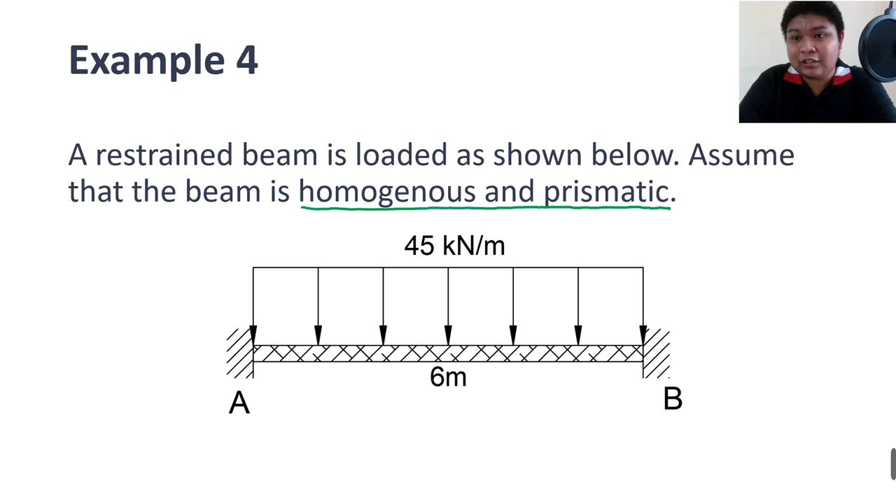Especially since our beam has a uniformly distributed load. So what are the questions here? Letter A, what is the vertical reaction at B? Letter B, what is the moment reaction at B? Letter C, what is the vertical reaction at A? Letter D, what is the moment reaction at A?

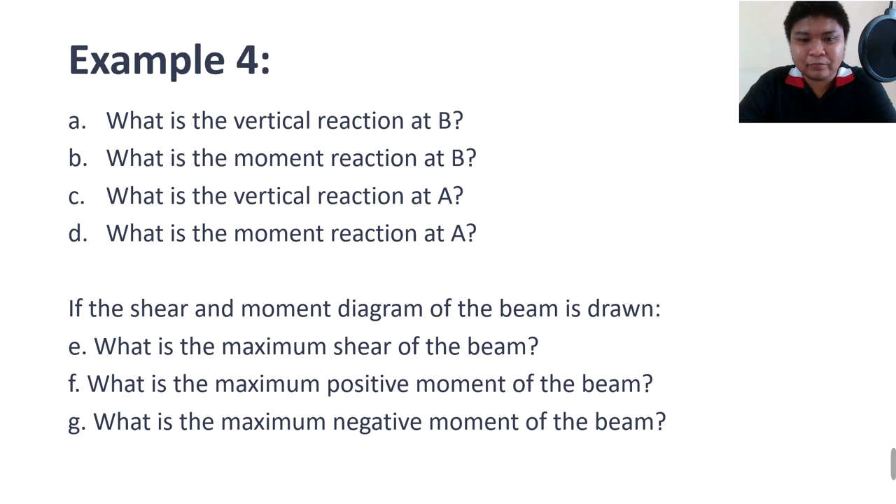Then, if the shear and moment diagram of the beam is drawn, letter E, what is the maximum shear of the beam? Letter F, what is the maximum positive moment of the beam? And letter G, what is the maximum negative moment of the beam? Let's go to OneNote and try to solve it.

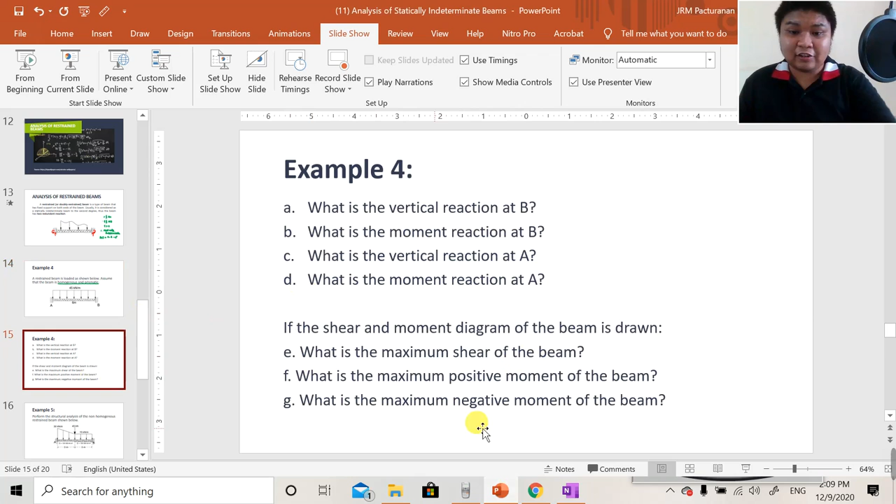I'll paste the question itself. So this is our example number 4. At the same time, let's include the questions. Now let's write the solution.

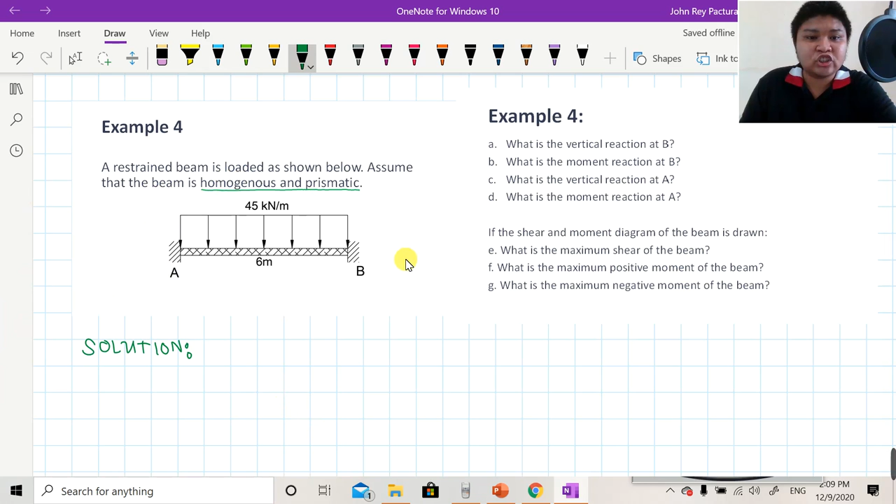Like the first example I presented for the propped beam, I will try to solve this beam using three methods: double integration, moment area, and conjugate beam method. But since there are two redundants here, we will have two equations, two unknowns.

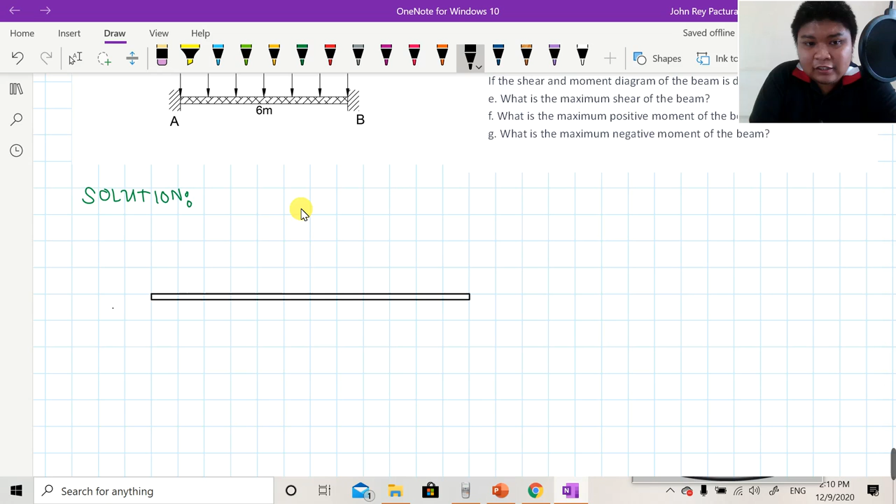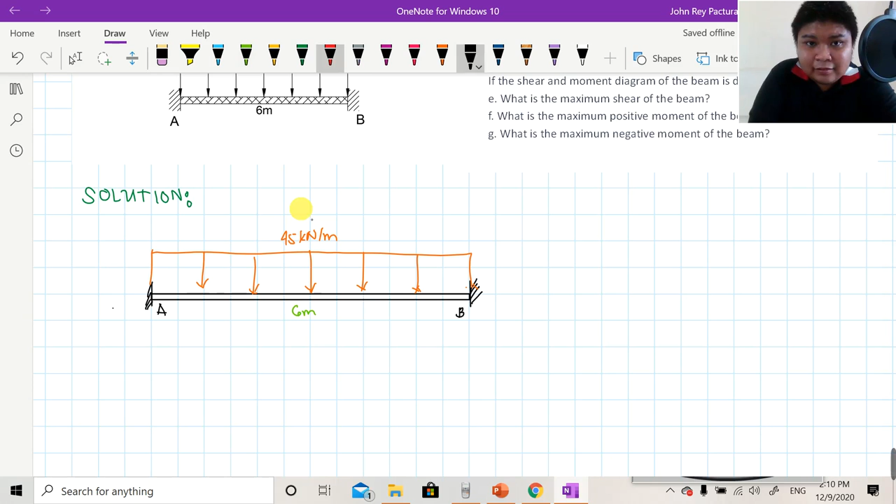Loading is 45 kN per meter. Let's put the dimension of 6 meters. At the same time, the points are A and B. So of course, the reaction RA and the moment reaction MA, and the reaction RB and moment reaction MB.

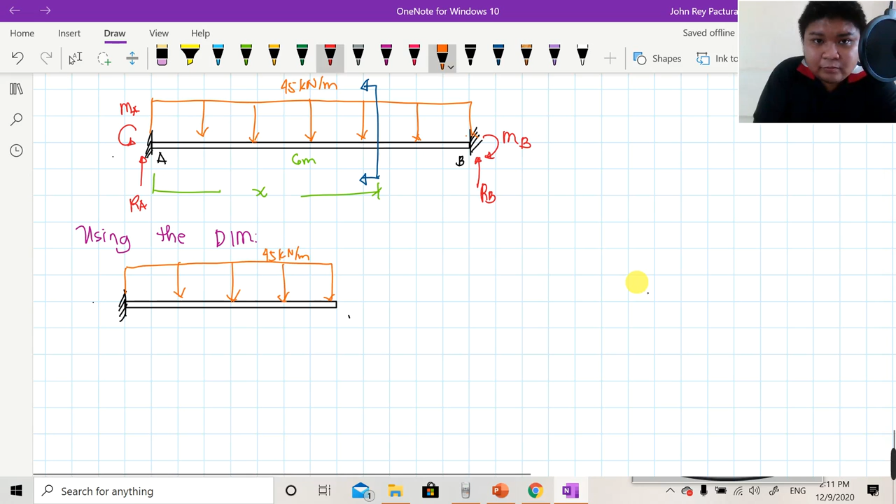Sabihin na natin na ito yung naka-cut na bahagi, tapos yung ating distributed load na 45 kN per meter. Ilagay ko yung mga reactions natin na RA at the same time yung moment at A. Ito yung iseset natin as point A, at ito yung iseset na point X. Yung distance dito ay X.

Ang unang step natin kapag double integration method, kailangan natin i-establish yung moment function. Taking summation moment at X equals 0, ibig sabihin clockwise moment equals counterclockwise moment. Erase ko na muna to para hindi na nakakalito.

Considering point X dito sa cut natin, guys, ang clockwise moment lang natin ay isa lang, yung RA, equal sa RA times distance niya na X. Ang counterclockwise naman, equal to MA, tapos yung 45 kN, yung length niya ay X, at yung centroid ay X over 2 kasi nandito siya, yan yung center of gravity, plus yung moment function natin. Pag sinimplify natin to, ang moment natin ay equal to RAX minus MA minus 45 over 2 x squared. Ayan na, meron na tayong moment function.

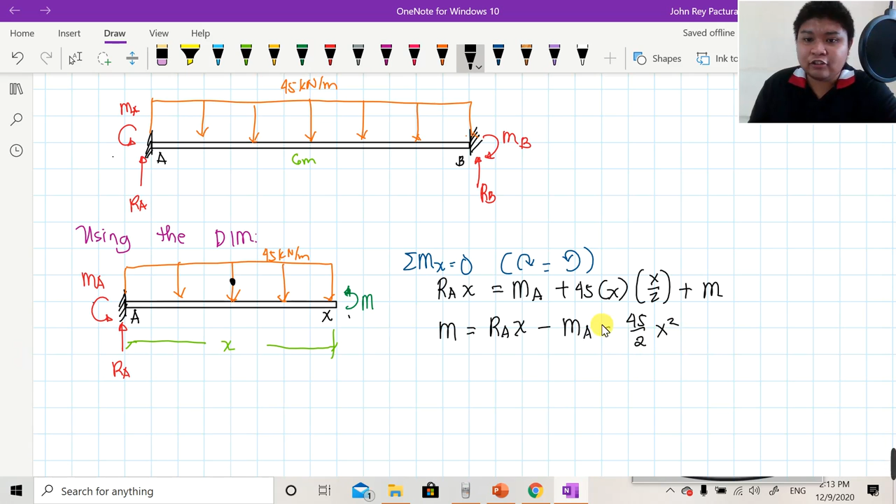Pagkatapos nito, ready na tayong mag-double integration. Una, EI y double prime, isulat mo yung mismong moment function: RAX minus MA, since this is a moment ilalagay ko muna x raised to 0, kasi usually kapag DIM nag-x raised to 0 tayo, pero makakancel out din naman yan kasi dalawang beses yung process of integration natin. Minus 45 over 2 x squared.

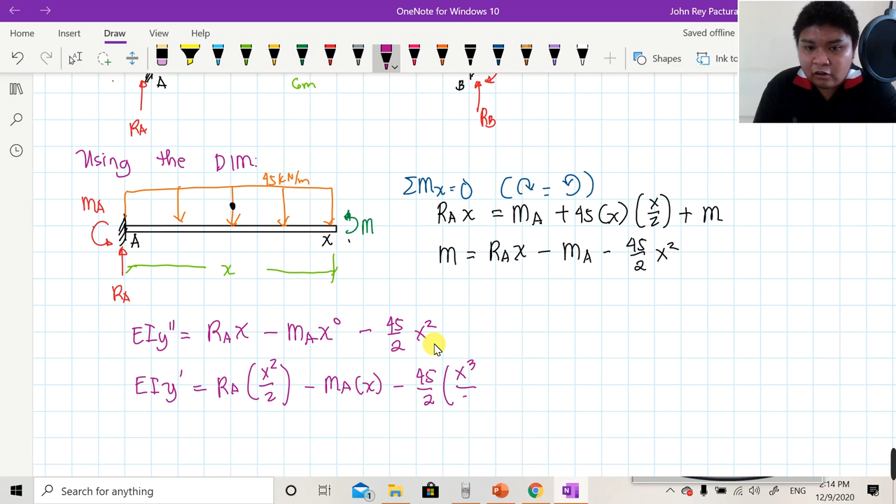Para sa first integration, ang mahahanap natin ay EIY prime, equal sa RA times x squared over 2, minus MA times x, minus 45 over 2 times x cubed over 3. Remind ko lang kayo, kapag nag-i-integrate kayo, do not forget the arbitrary constant c sub 1. Pag sinimplify natin to, magiging 1/2 RA x squared minus MAX, minus 15 over 2 x cubed plus c sub 1. Ayan, na-simplify na natin yung unang integration.

Therefore, i-follow up na natin yung second integration, magiging EIY. Yung 1/2 RA magiging x cubed over 3, minus MA x squared over 2, minus 15 over 2 x to the 4th over 4, plus c sub 1x plus c sub 2. Kapag in-arrange natin to, magiging 1 over 6 RA x cubed minus 1/2 MA x squared minus 15 over 8 x to the 4th power plus c sub 1x plus c sub 2.

Ayan, natapos na natin yung ating dalawang integration. Meron tayong dalawang arbitrary constants, c sub 1 and c sub 2, at para ma-solve natin yon kailangan natin ng boundary conditions. Usually, sa mga statically determinate structures, meron lang tayong dalawang boundary conditions, pero kapag indeterminate, more than 2.

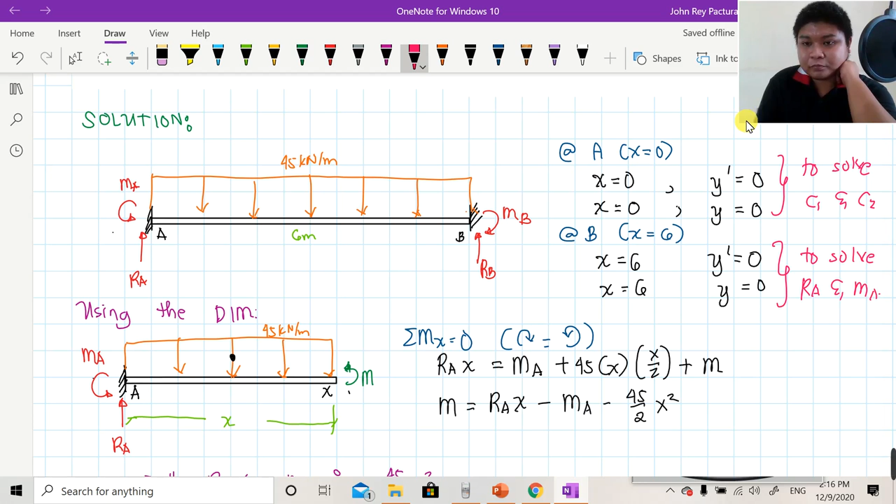Sige, simulan natin isolve yung C sub 1 and C sub 2. Ilagay natin na at x is equal to 0, y prime equals 0, yun yung nasa point A. Ito ang gagamitin nating equation.

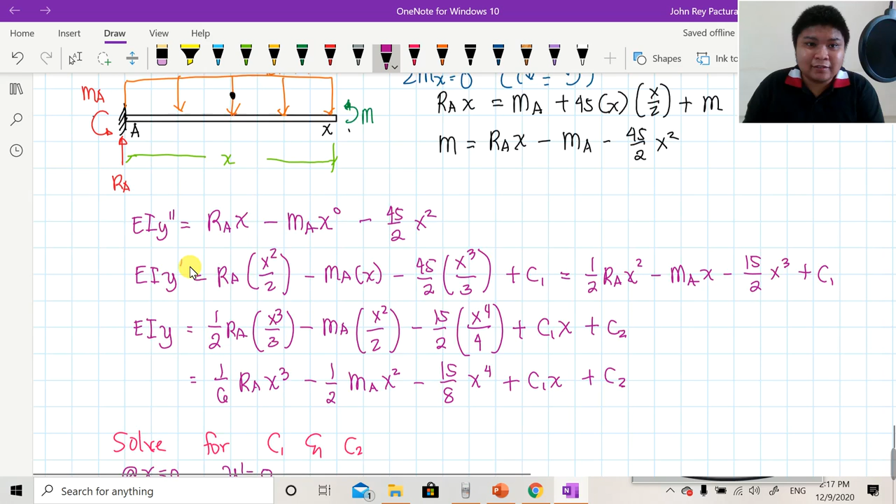EI, syempre ang y prime is 0: EI is 0 equals 1/2 ng RA tapos 0 squared minus MA times 0, minus 15 over 2 times 0 cube plus C sub 1. Kung i-observe mo, lahat din lang naman yan maka-cancel out, so pwede na natin i-conclude na yung value ng C sub 1 natin ay equal sa 0. Same thing ang mangyayari kapag sinet na natin yung another boundary condition na at x is equal to 0, y is equal to 0. Since this is the deflection, ito na yung gagamitin natin.

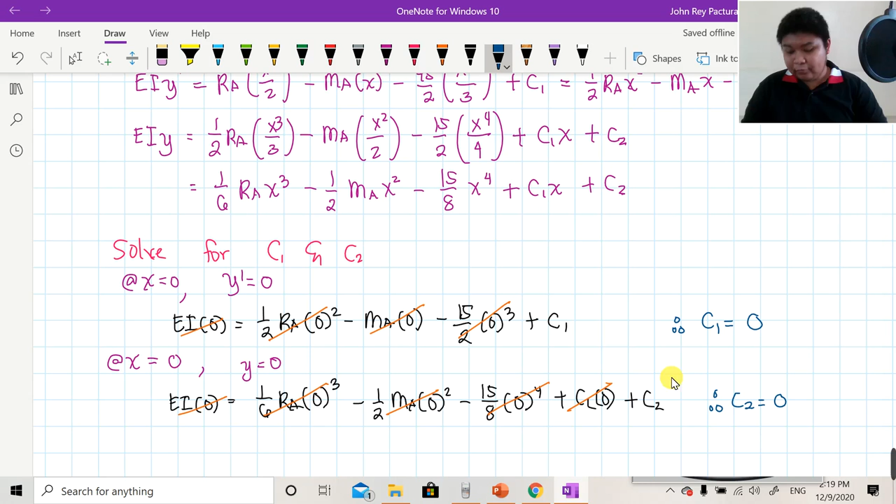So therefore, ang magiging solution natin ay EI0, that is 1 over 6 RA ng 0 cube minus 1/2 MA ng 0 squared minus 15 over 8 ng 0 fourth, plus C sub 1, 0, plus C sub 2. At mag-cancel out din naman sila, kaya ang magiging value ng C sub 2 natin ay equal din sa 0. So na-solve na natin na C sub 1 and C sub 2 are both equal to 0. After natin nitong ma-solve, gagamitin natin yung another set of boundary conditions para ma-solve natin yung MA saka yung RA.

Okay, so solve for the reaction at A and yung moment at A. So yung una kong gagamitin na condition is at x is equal to 6, y prime is equal to 0. So ito na siya, gamitin mo ulit ito.

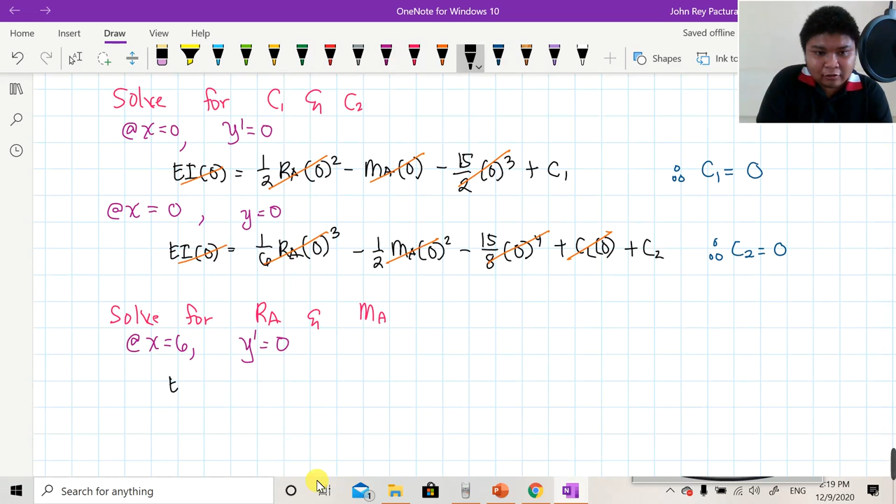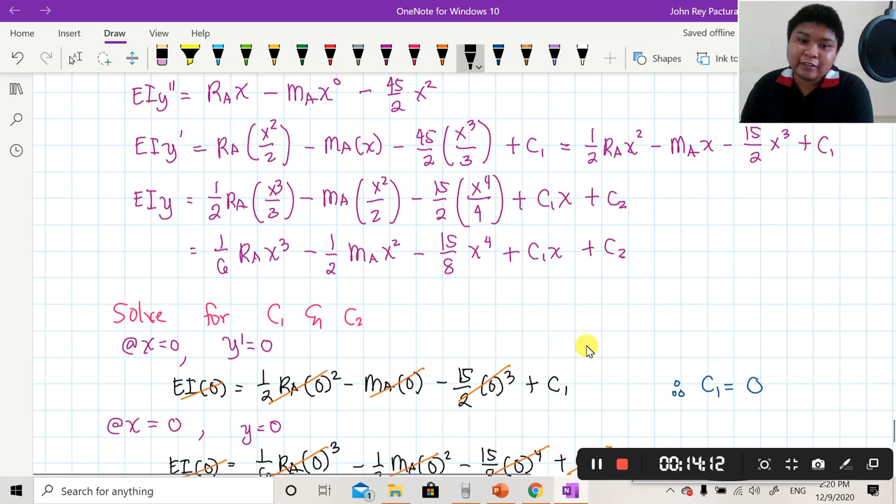Since y prime equals 0, EI 0 is equal to, dito na tayo tututok, ito, kasi ito yung na-derive natin na EI y prime. Pero do not forget na yung x natin sa pagkakataong ito ay equal na sa 6. So therefore, that will be 1/2 ng RA, tapos 6 squared, minus MA, times 6, minus 15 over 2 ng x cube. Lagay natin siya as 15 over 2 ng x cube, which is 6 cube. Supposed to be, may C sub 1 pa dito na i-consider, but of course, alam nyo naman na C sub 1 is equal to 0, so okay na yan.

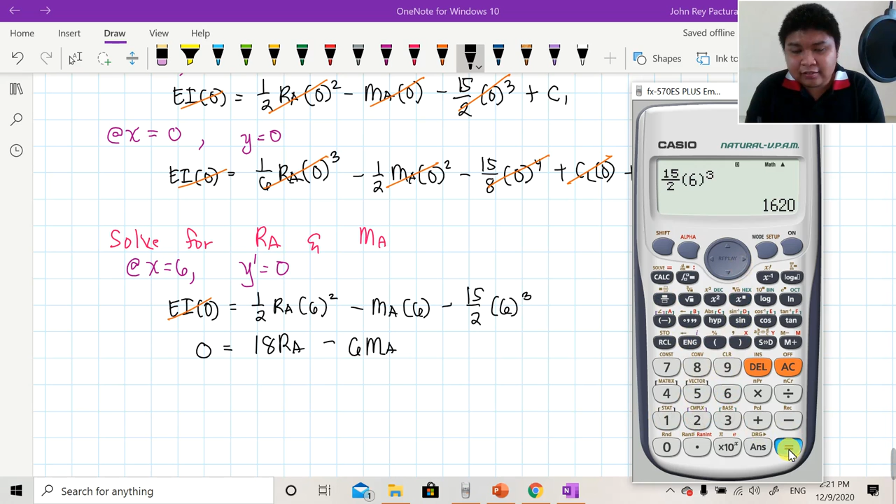Kapag sinimplify natin to, ang kalalabasan, 0 is equal to 1/2 ng 6 squared is 18 RA minus 6 MA. Check ko lang, 1/2 ng 6 squared, ang sagot is 18, tapos 6 MA, then 15 over 2 ng 6 cube. Ang sagot natin ay 1620 minus 1620. Para maging equation siya, ang kalalabasan ay 18RA minus 6MA is equal to 1620. So ito na ang ating equation number 1.

As I said, usually 2 equation, 2 unknown ang masosolve mo dito. So next tayo, at x is equal to 6, y is equal to 0. So this time, ito na yung gagamitin natin. But do not forget that c sub 1 and c sub 2 are both equal to 0, so therefore wala na tayong problema doon.

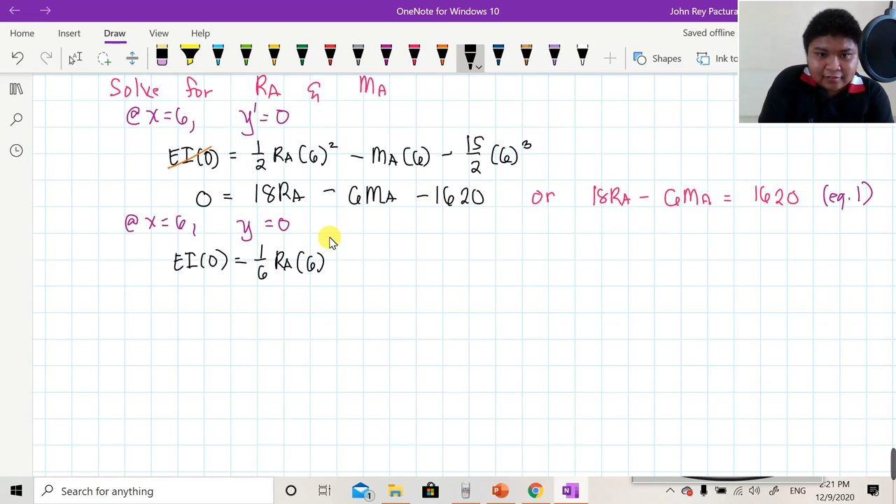I-substitute mo lang as EI0 is equal to, ito siya, 1 over 6 RA x cube. So 1 over 6 RA, tapos 6 cube minus 1 half MA 6 squared, minus 15 over 8 x to the fourth, minus 15 over 8, 6 to the fourth. Ulitin ko lang yung sinabi ko, c sub 1 and c sub 2 are equal to 0, so therefore makakancel out din lang naman itong EI0. So 0 is equal to, pag kinompute natin ito, that will be 1 over 6 ng 6 cube.

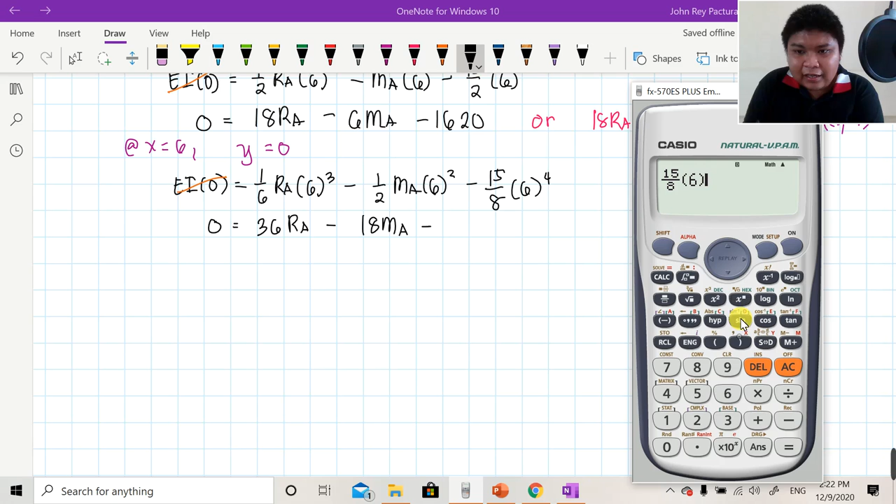36 RA minus 1 half ng 6 squared. Ilan siya? 18, 18 MA, then minus 15 over 8 ng 6 to the fourth. Ang magiging sagot natin ay 2430. Pag in-arrange natin ito para maging second equation, arrange natin siya as equation 2: 36 RA minus 18 MA equals 2,430. Set mo lang to as equation number 2.

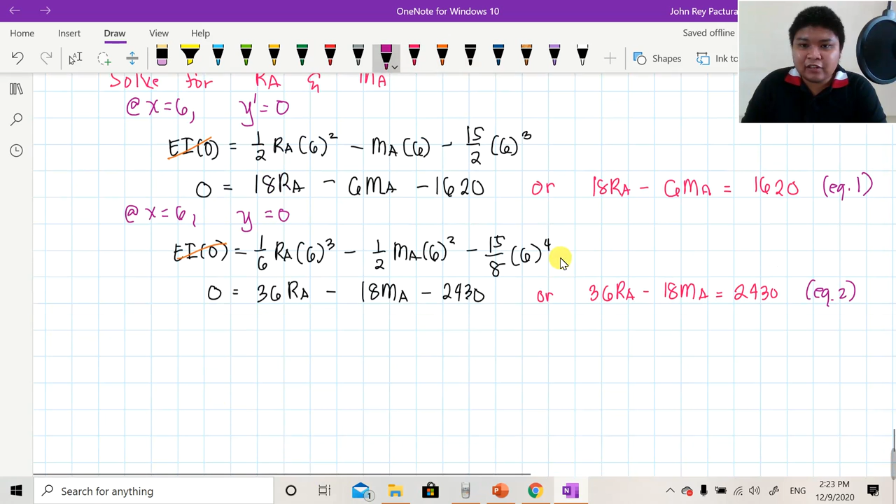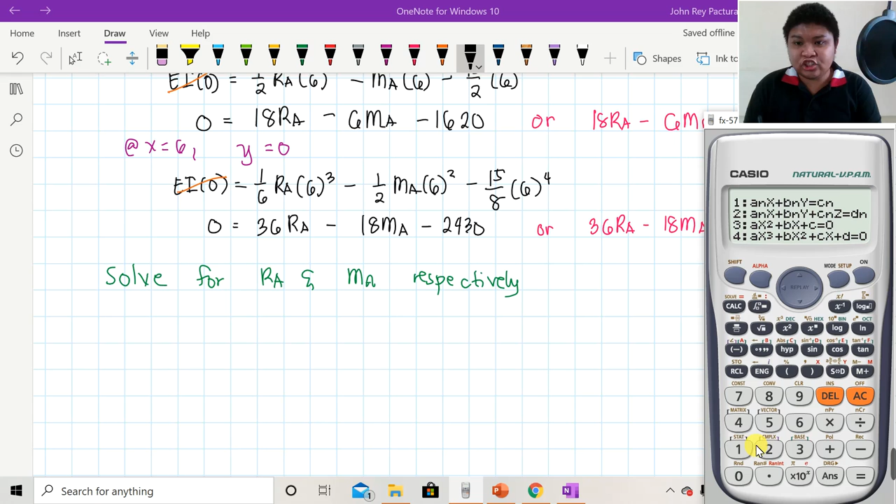We have 2 equations, 2 unknowns ang hinahanap natin. Pag sinolve natin yung dalawang equation na yan, mahahanap mo na yung RA and MA respectively. Solve for RA and MA respectively. Ang mangyayari dito, bahala ka nang mag-explore sa calculator mo, pero yung nakikita nyo sa screen nyo na calculator ko na emulator, syempre may equation solver siya. So I assume na yung ginagamit nyo rin na calculator ay capable na mag-solve ng 2 equations, 2 unknowns.

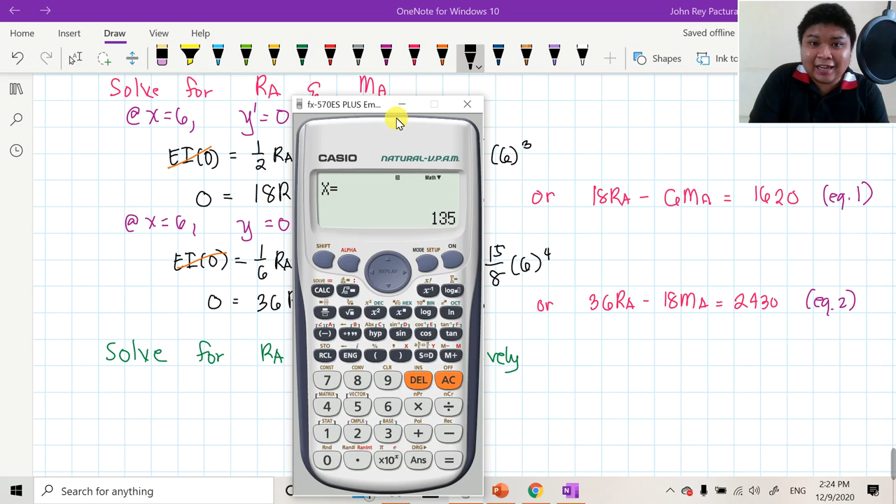So for equation 1, that will be 18, negative 6, then 1, 6, 20. Tapos for equation number 2 naman, that will be 36, negative 18, tapos 2430. So yung ating RA will be 135 kilonewton. RA is 135 kilonewton. On the other hand, yung MA natin is equal to 135 kilonewton meter din as well, 135 kilonewton meter.

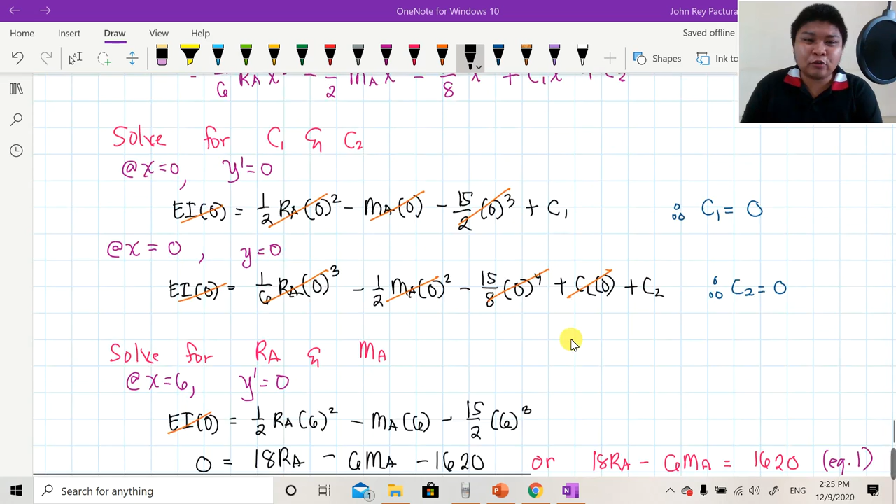So ayan, naipakita ko na sa inyo kung paano natin siya isosolve using the double integration method. Kaya lang, ulitin ko, may bias ako dito sa pag-solve. Usually, ang favorite ko ditong method is either the moment area method or the conjugate beam method, kasi naman napakaraming equations na ipoproduce mo using DIM, right? So isolve natin ito using the moment area method. By moment area method, i-drawing natin yung magiging moment diagram by parts niya.

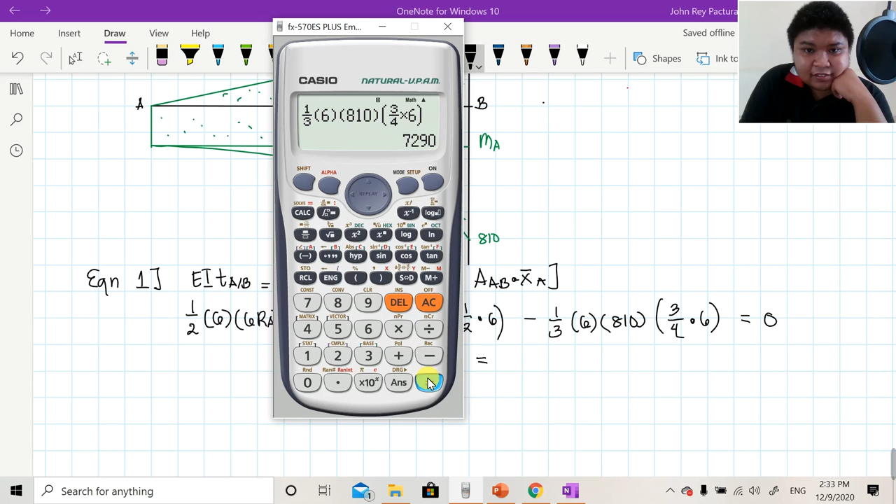of 6,810 tapos 3/4 ng 6. So, ang sagot natin ay 7,290.

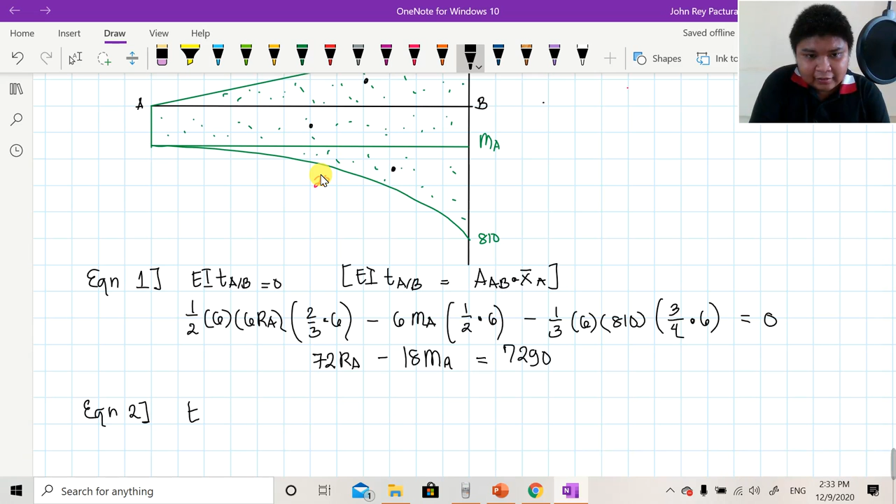Next, using equation 2 naman, this time kapag equation 2 ang gagamitin natin, yung EI, area, sa gitna ni A and B is 0. So literal lang, nakokomputin lang natin yung area, wala nang centroid na pag-uusapan.

So that will be 1/2 ng 6, tapos 6 RA, and of course, yun lang naman ang ating positive, the rest na area ay negative. Halimbawa, ang MA, multiply din natin ng 6 kasi di ba tingnan nyo, MA times 6 lang naman siya. And lastly, for the spandrel of the parabola, 1/3 lang ng 6 tapos 810.

So that will be equal to 0. Again, pag isimplify natin to, ang magiging result ay 18 RA, tama ba no? 18 RA siya, minus 6 MA. So pag nilipat natin yon, 1/3 ng 6 tapos 810. Ang lalabas ay 1620. So 1620.

Ito na, meron na tayong 2 equations, 2 unknown. So this is equation number 1. This is equation number 2. Again, gamitin mo na lang yung ating calculator to solve those 2 equations. Solve for RA and MA using equation 1 and 2. So, mahahanap natin na yung value ng RA natin and yung value ng MA.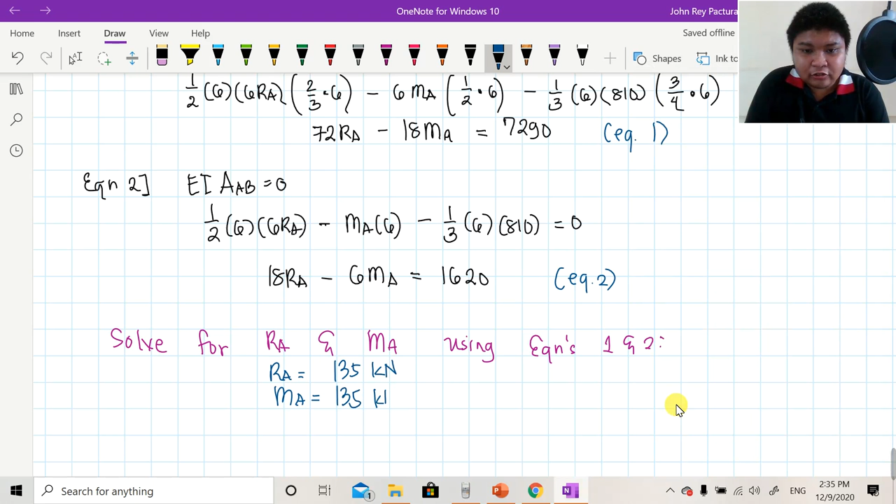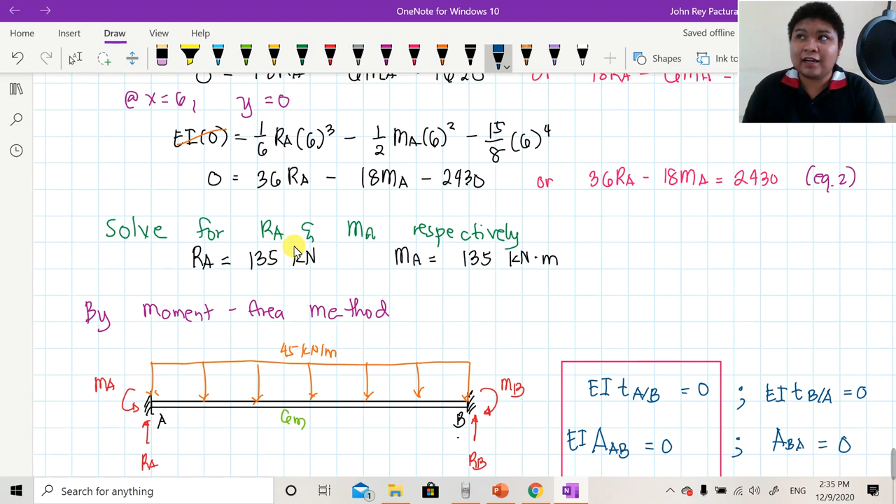So dalawang methods na ang prinesent ko sa inyo and parehas tig 135 ang nakukuha. So I hope wala nang doubt sa paggamit ng method na gagamitin nyo for your future analysis. Pero still, meron pa tayong pangatlong method na kailangan i-present using the conjugate beam method. Sige, mag-conjugate beam naman tayo.

Well, wala namang pinagkaiba yung moment area method saka yung conjugate beam kasi kung ano yung na-drawing natin na moment diagram by parts, yun din naman yung gagamitin natin sa conjugate beam. Kaya lang, syempre, yung area sa taas magiging upward distributed load tapos yung area sa baba, that will be the downward distributed load. Okay? So, sige, pakita ko na lang sa inyo kung ano yung magiging solution natin for conjugate beam method.

So halimbawa, meron tayong real beam na restrained beam. Sulat na lang natin siya as real beam. And ilagay natin yung mismong load na 45 kilonewton. Diba? So ito siya.

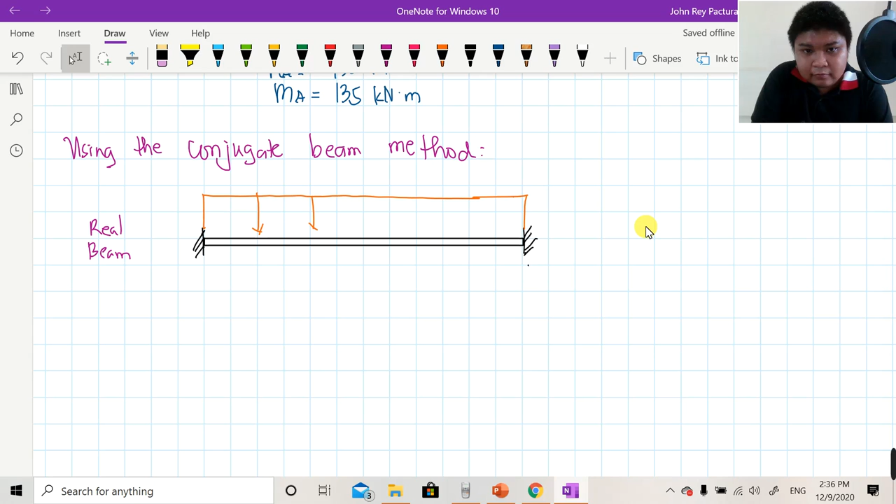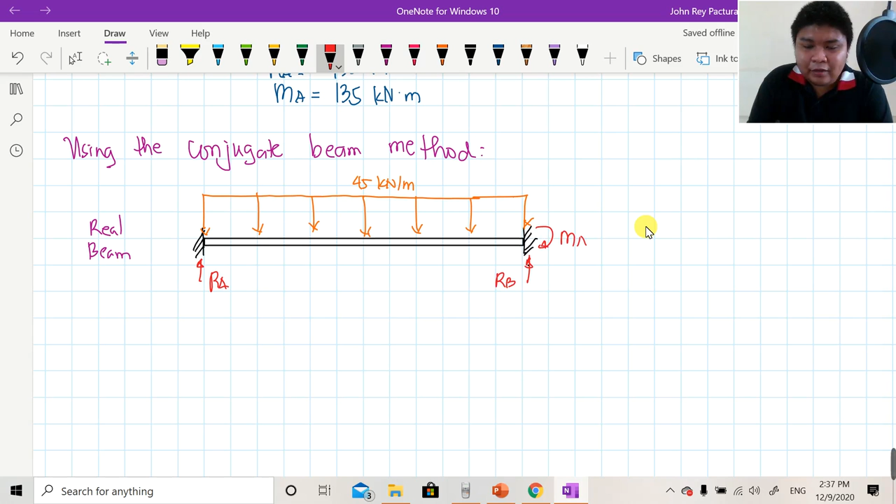Take 45 kilonewton per meter, sorry. So 45 kilonewton per meter. And do not forget to place the reactions RA, tapos RB, and the end moments MA, then MB. Yung ating length ay 6 meters.

Kapag drawing natin yung conjugate beam, ang mangyayari dito is magiging unstable siya. Ulitin ko, sa conjugate beam method, kung ang original na beam ay statically determinate, syempre pagdating sa conjugate beam, statically determinate din siya. Pero kapag yung original beam natin ay statically indeterminate, pagdating naman sa conjugate beam, magiging unstable siya.

So, for conjugate beam, ang mangyayari, wala na siyang support. Bakit? Kasi 'di ba, kung fixed dito sa both ends, pagdating sa conjugate beam, dapat maging free siya. And since walang support, malamang unstable na rin talaga siya.

I-copy ko lang yung ating moment diagram by parts from the moment area method. So yung una, this is 6RA. So sige, drawing natin siya as 6RA. And this will be an upward force kasi nasa taas siya. So, lagay ko lang pala na point A dito, tapos point B. So, 6RA. Tapos, meron tayong moment na MA.

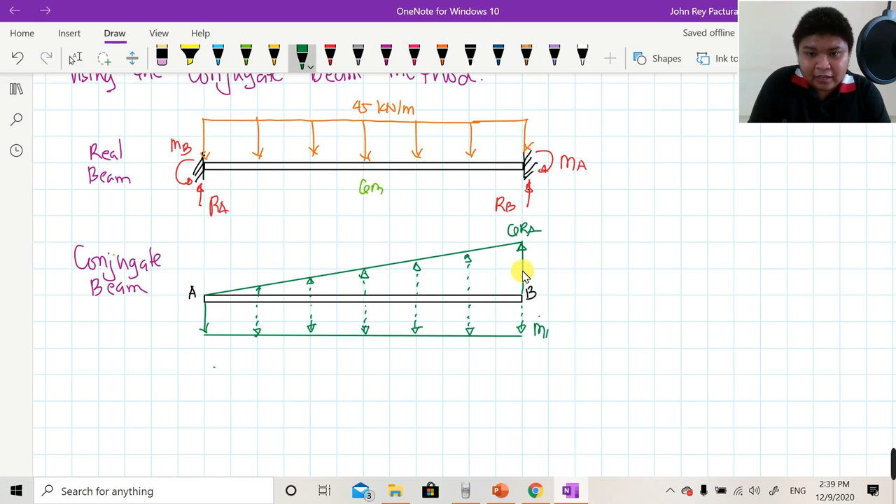Drawing din natin yung MA na yon. Pero pababa na siya. Ayan. So, yung kanyang magnitude ay MA. And lastly, do not forget the spandrel of the parabola. 810 yung kanyang magiging height. Drawing lang natin. Lagay ko pala yung degree as first degree, second degree. And ito, 810. So, ito na yung ating conjugate beam.

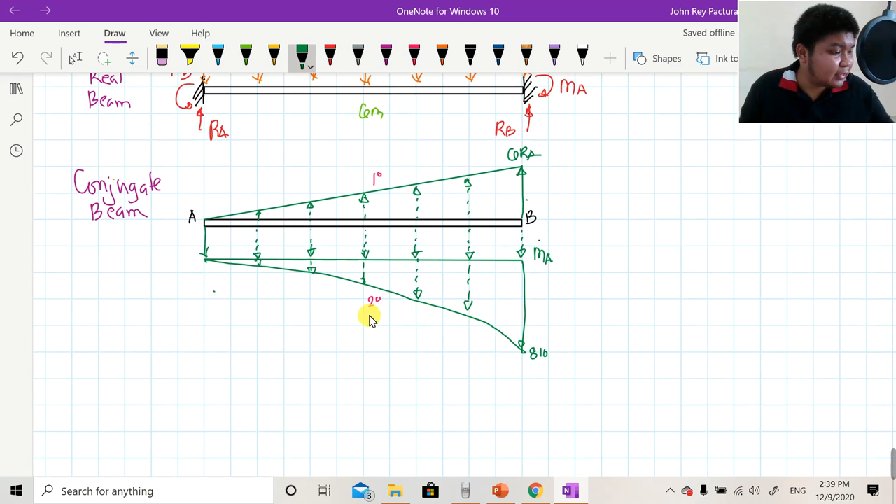So, this time, gagamitin natin yung dalawang equations of equilibrium para sa conjugate beam. So, usually, ang magiging kalalabasan ulit nito, two equations, two unknown. So, yung una, lagay ko dito na consider conjugate beam. Yung unang magiging process natin, summation forces vertical equals 0. So, up equals down. So, yung upward force natin is itong triangle and itong natitirang dalawa ay mga downward force.

Kaya 1/2 ng yung base ay 6 tapos 6RA. Yung downward forces natin ay 6MA. Then, syempre, for the spandrel of parabola, 1/3 ng 6 tapos 810. So, pag inayos natin to, for instance, itong 1/2 times 6 times 6, pwede natin to class magawa as 18RA, di ba? Tapos, transpose mo lang itong 6MA, so minus 6MA.

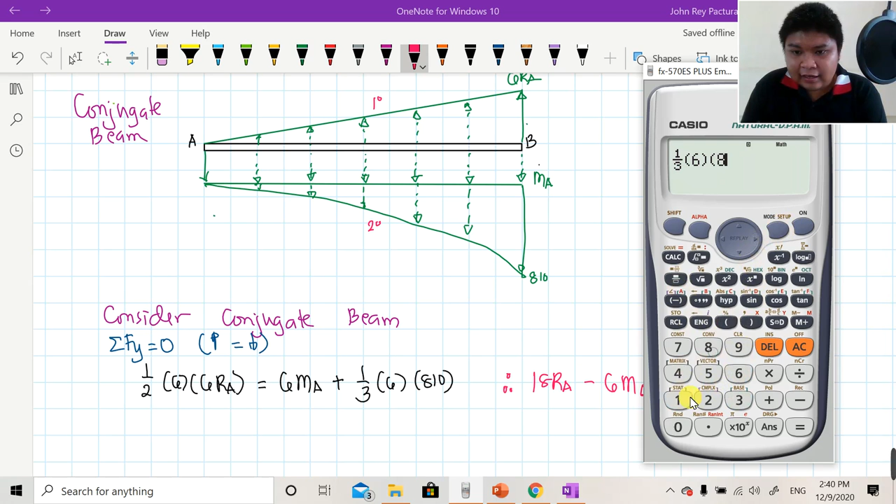Ang magiging final answer ay, balik tayo sa mode 1, 1/3 ng 6 ng 810. So, ang sagot ay 1620. Ito na yung ating equation number 1.

Sunod is summation moment equals 0. Bahala ka na lang kung saan mo gustong mag-moment, summation moment at A or summation moment at B. Siguro ako, summation moment at A equals 0. Clockwise moment equals counterclockwise, pero i-emphasize ko yon, or pwede mo ring gamitin summation moment at B equals 0. Kahit alin sa dalawa, pwede mong gamitin.

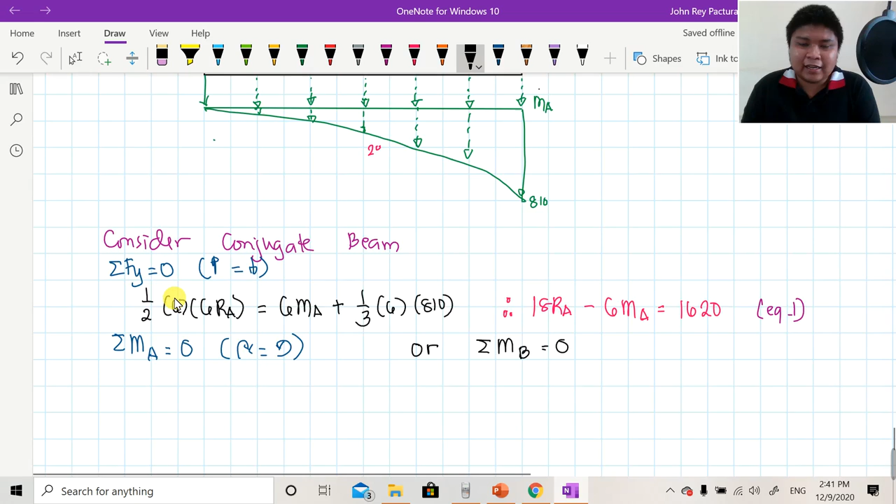Kapag nag-take ka na ng moment at A, unahin muna natin yung clockwise moment. Actually, dalawa ang clockwise moment natin: yung 6MA, yung moment arm niya ay kalahati ng 6, tapos yung spandrel na 1/3 ng 6, tapos ng 810. Yung moment arm niya, considering point A, syempre yung center of gravity niya ay located dito, so therefore that is 3/4 ng 6.

Tama ba? At that will be equal to, ilan na siya? Itong counterclockwise moment ay 1/2 ng 6, tapos 6RA, yung kanyang moment arm ay 2/3 ng 6. Pag inayos natin to, this will be 18MA.

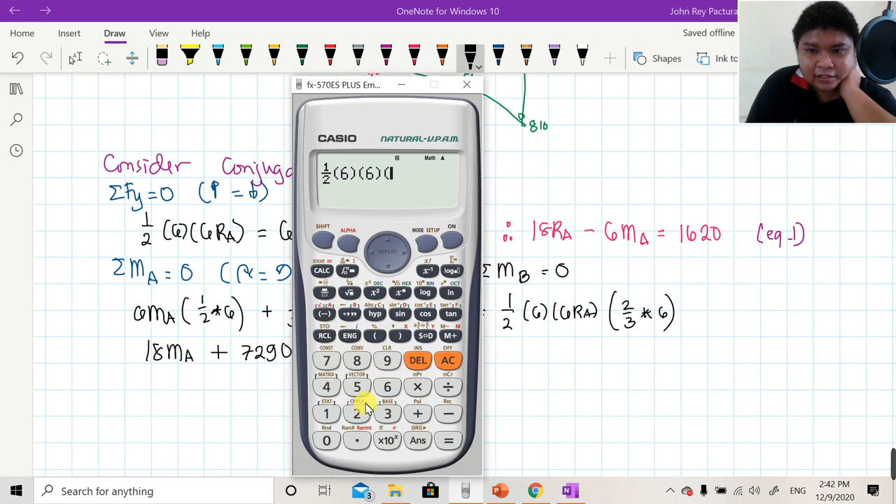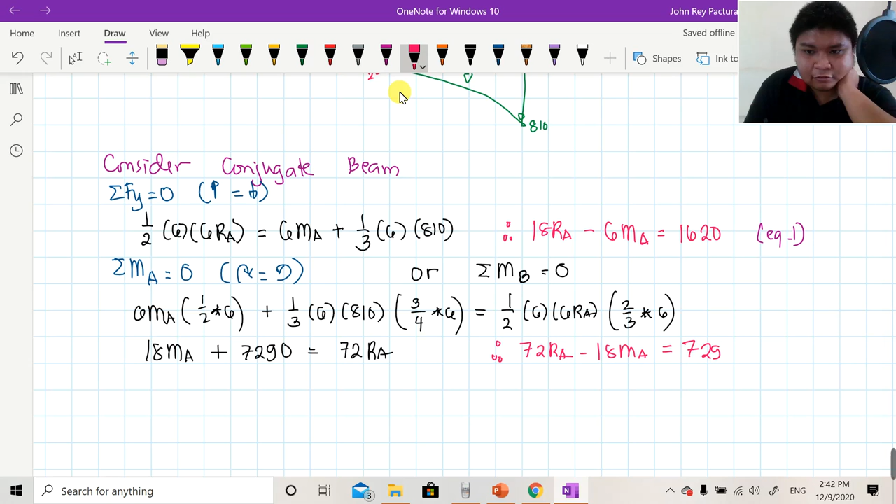Dito naman sa kabila, pag kinompute natin siya as 1/3 ng 6, 810, then 3/4 ng 6, ang sagot ay 7,290, and that will be equal to sa kanan naman, that is 1/2 of 6 times 6, then 2/3 of 6, ang sagot ay 72 RA. Kapag inarrange natin to, ang kalalabasan nito guys ay 72 RA minus 18 MA is equal to 7,290. So meron na tayong equation number 2.

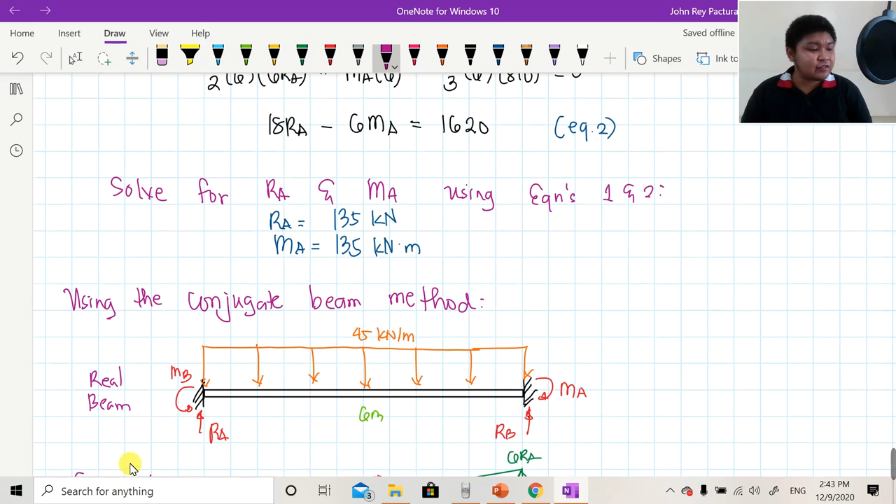Kung i-observe mo, balik tayo sa moment area theorem, actually yan yung dalawang equations na nakuha natin. Halos magkapatid lang talaga si moment area saka si conjugate beam method. Ipakita ko na lang sa inyo kung paano natin isosolve yung equation 1 and 2 using our calculator.

Solve for equations 1 and 2. Ang mahahanap mo, yung RA at the same time yung moment at A, which is parehas din lang naman tong 135, kasi nga ulitin ko, kung yung na-derive mong equation ngayon ay parehas lang sa moment area theorem. Okay, so that will be 18, tapos negative 6, 1620, tapos 72, negative 18, o 7290. So ayan o, tig 135 both answer.

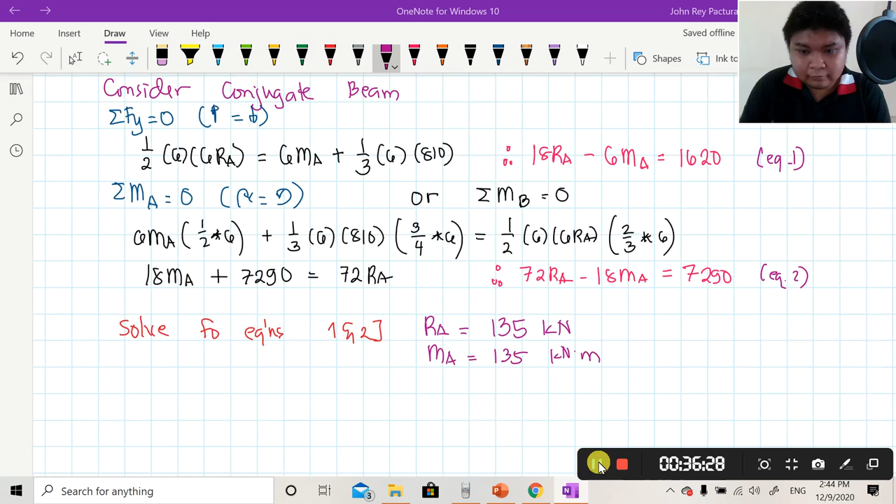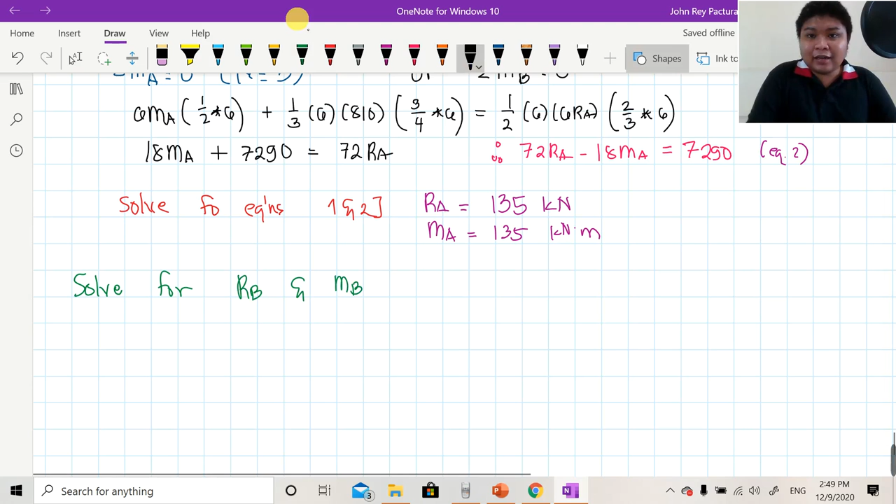Since nagkasundo na yung tatlong methods natin, na yung RA and MA ay 135 kilonewton and 135 kilonewton meter respectively, ang magiging next step na natin ay kailangan na nating isolve yung natitirang dalawang reactions, yung RB at the same time yung MB. Pero sa pagkakataong ito, ang gagamitin na lang naman natin ay equations of equilibrium. Kaya na yon. So sige, drawing natin yung original na figure natin.

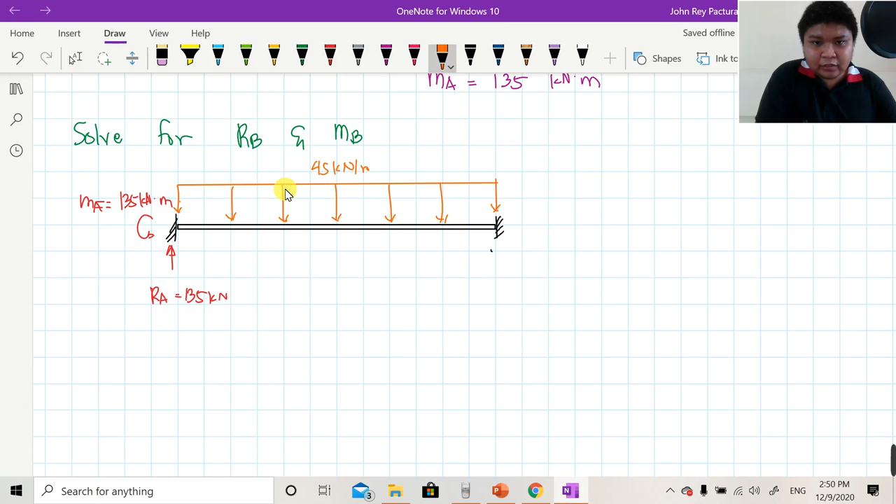So nandito na siya, parehas fixed support, tapos 45 kilonewton per meter siya. Okay, so sulat natin dito na RA is equal to 135 kilonewton at the same time yung moment at A is 135 kilonewton meter, and 45 kilonewton per meter. This is 6 meters. Kailangan natin ay yung RB at the same time yung moment sa B.

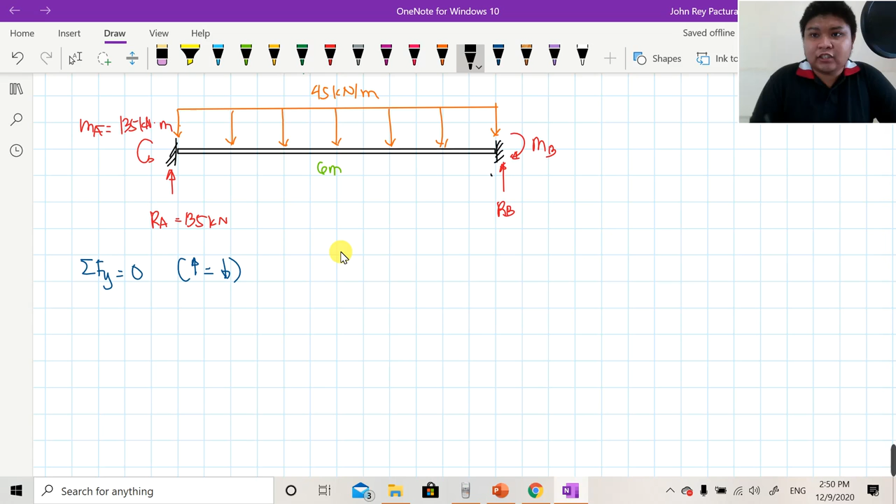Summation forces vertical equals 0, that will be up equals down. Dalawa lang naman yung up, RA and RB. So that is 135 plus RB, that is equal to yung downward, which is 45 times 6. Pwede na nating sabihin na yung RB natin ay equal sa 135 kilonewtons. Tama ba? Yes, tama. 45 times 6 minus 135.

Ayan, tama. At the same time, summation moment, pwede kang mag-moment sa A, pwede kang mag-moment sa B, bahala ka. Sige, gawin ko na lang sa A. Summation moment at A equals 0. Clockwise moment equals counterclockwise, ang clockwise moment natin ay dalawa. Yung una, itong 45 kilonewton per meter, multiply by 6 meter and 1/2 ng 6. Nagkamali lang ako ng nasulat, 1/2 ng 6. So therefore, ito na siya.

At the same time, yung mismong moment at B ay isang clockwise moment. Yung counterclockwise natin ay itong 135 na moment reaction sa A. Consider mo yan, 135, and of course yung ating RB, counterclockwise din to. Pero since yung RB ay alam na natin na 135 siya, parang impractical na isulat mo pang RB, no? So dapat 135 times 6 na lang.

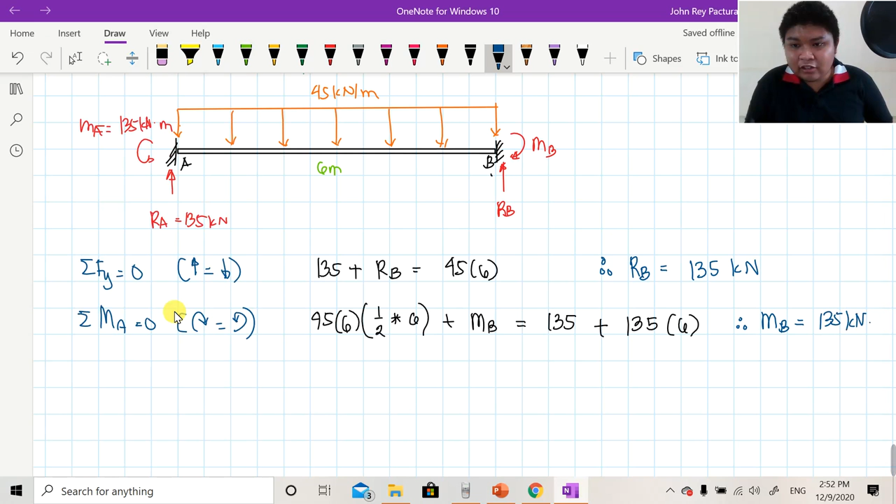Mahahanap na natin yung value ng moment at B is equal to, simply 135 plus 135 times 6, minus 45 times 6 and 1/2 ng 6. Ang lalabas dito ay 135 kilonewton meter. So ayan na, na-solve na natin class yung reaction sa RA saka sa RB.

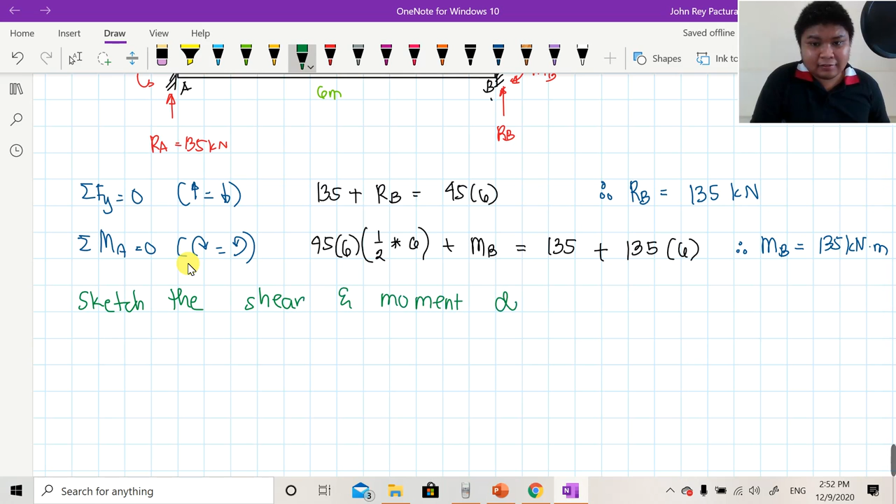Ang magiging last part ng ating structural analysis ay of course i-sketch na natin yung ating shear and moment diagram. Ngayon, ilagay na natin class yung na-obtain na values ng ating mga reaction. Take note, 6 meters yung length ng ating beam, and that is a doubly restrained beam.

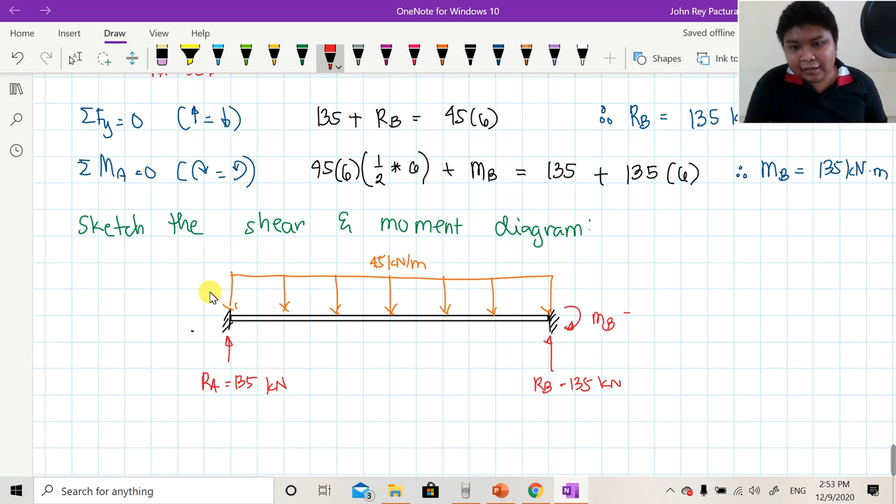45 kilonewton per meter yung distributed load. Lagay lang natin siya. And yung ating reaction, RA equals 135 kilonewton. So as RB, RB equals 135 kilonewton. Yung moments, ganun din. Both MA and MB are 135 kilonewton meter. MA equals 135 kilonewton meter.

Notice na kung o-observe nyo guys, yung ating naging reactions, parehas yung RA and RB, parehas yung MA and MB. Well, of course, I am expecting this na magiging parehas sila kasi yung ating structure in the first place ay symmetric. So when we say symmetric, yung support niya ay parehas siya. Kung parehas simple support, symmetric yon. Tapos, this time, parehas fixed support. And yung loading ay symmetrical din. So therefore, parehas talaga yung magiging values ng RA and RB. Tapos, parehas yung MA and MB. Nagkataon lang guys na parehas yung RA and MA.

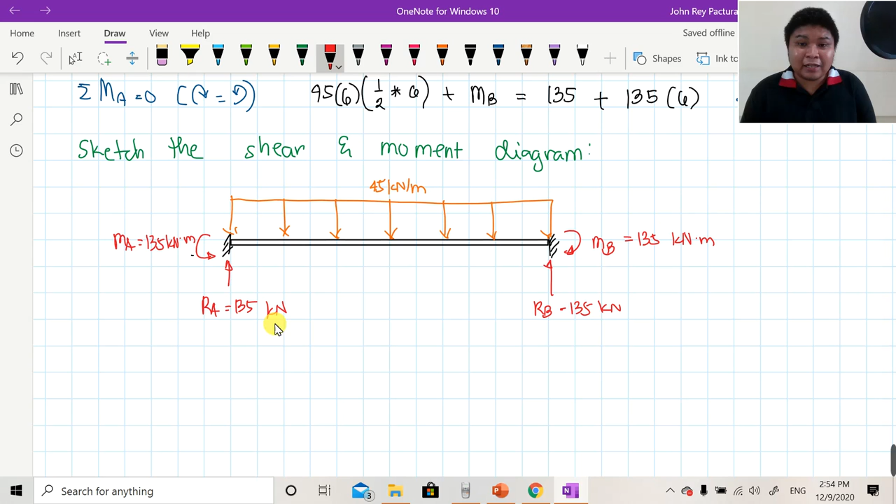Nagkataon lang yon. So ito, halimbawa, pwedeng 500 yung MA, pwedeng 100 yung RA. Pero kung 100 yung RA, dapat 100 din yung RB. And kung 500 ang MA, dapat 500 din yung MB. So yun yung gusto kong i-point out, no? Nagkataon lang yung MA saka RA na parehas, pero by principle of symmetric structures, dapat yung RA saka yung RB parehas, so as yung MA and MB.

So ready na tayong mag-sketch ng shear diagram nito. Napakadali lang naman nito dahil distributed load siya. Sige, drawing natin yung shear diagram. Dahil may 135 na pataas sa point A, nakalimutan ko palang i-label point A ito and point B, and this will be 6 meters. So drawing natin as 135.

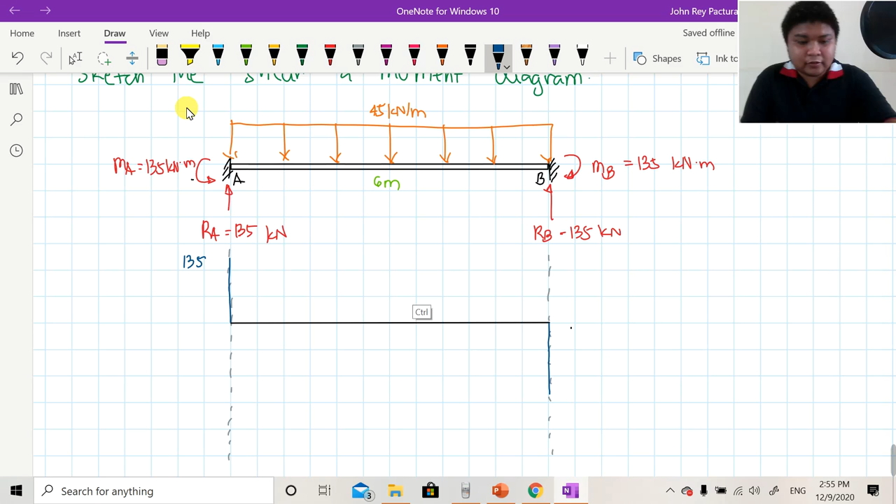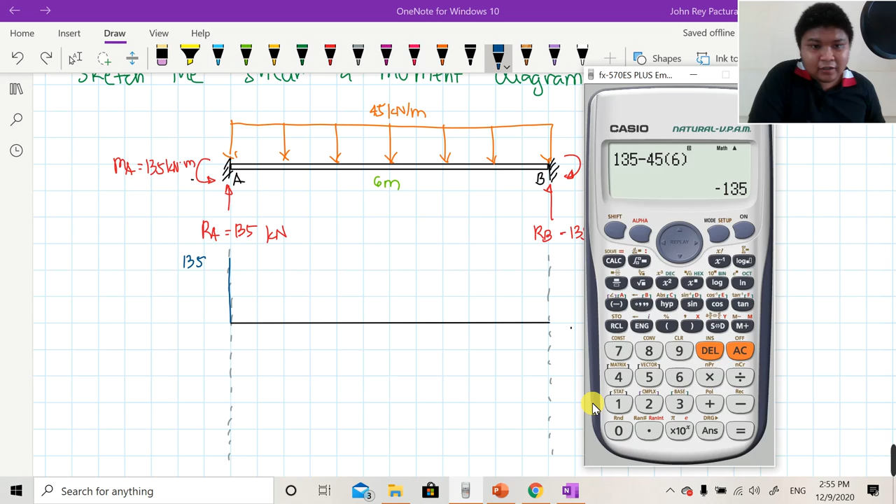Tapos, sa baba, drawing din natin, 135 muna dito. Tapos, may distributed load, kaya 135 minus 45 times 6. So ang sagot, babagsak siya at negative 135. Ito siya, negative 135. And dahil may pataas din na 135 sa point B, so by the way, equal sign ito. This is an equal sign. Dahil may pataas din na 135, malamang masasarado yung ating shear diagram.

Ayan, balance siya. And our maximum shear, isulat na natin, is equal to both positive and negative 135 kilonewton. And dahil symmetrical siya, there is no need naman for you to perform ratio and proportion. Parehas na ito, tig 3 meters. So ayan, tapos na tayo sa shear diagram.

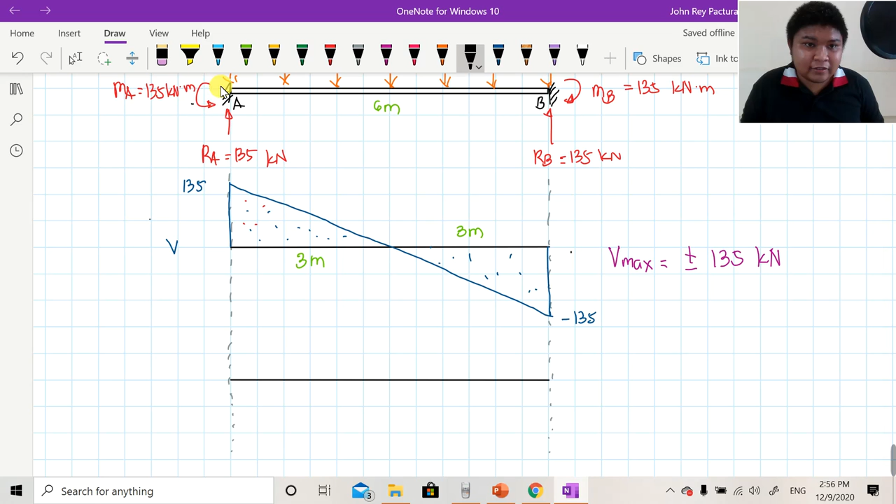Para magkaroon na tayo ng finale, i-sketch na rin natin yung ating moment diagram. This time, magsisimula tayo sa 135. Pero ito magiging negative siya, di ba? Dahil counterclockwise, magne-negative yan dito. So therefore, drawing natin ito as negative 135.

Then after nito, i-consider natin yung area dito sa ating shear diagram. So negative 135 plus 1/2 ng 3 and 135, ang lalabas ay 67.5. So pag in-sketch mo, magiging ganito siya, 67.5. And ito na yung ating maximum positive moment.

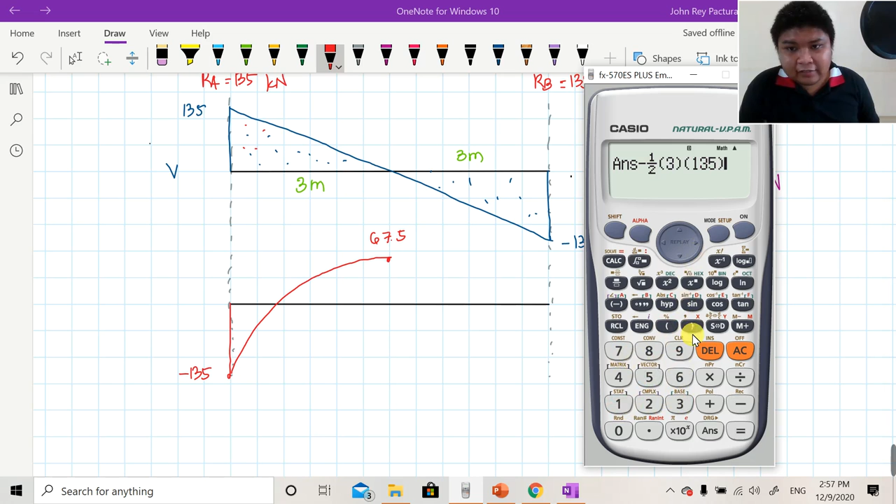Then, after nito, another triangle minus 1/2 ng 3 and 135. So ang lalabas doon ay negative 135. Bagsak ulit dito, negative 135. And of course, kung titingnan nyo, may clockwise na 135 sa B, malamang masasarado ulit yung ating moment diagram.

So even in our shear and moment diagram, symmetrical pa din yung kanyang itsura. Okay? So therefore, pwede na natin i-consider na yung maximum positive moment ay 67.5 kilonewton meter and yung maximum negative moment is negative 135 kilonewton meter. So tapos na tayo sa structural analysis.

All we need to do na lang is to provide the summary of our analysis. So to summarize, ano ba yung unang tanong? For letter A, what is the vertical reaction at A? And that is 135 kilonewton, di ba? Nandito siya. For letter B, what is the moment reaction at A? So moment at A natin is equal to 135 kilonewton meter.

For letter C, what is the vertical reaction at B? 135 kilonewton ulit yon. For letter D, what is the moment reaction at B? 135 kilonewton meter. For letter E, ang tinatanong is the maximum shear. Parehas kasi yung absolute value ni positive and negative shear. So therefore, I indicate this as plus or minus 135 kilonewton.

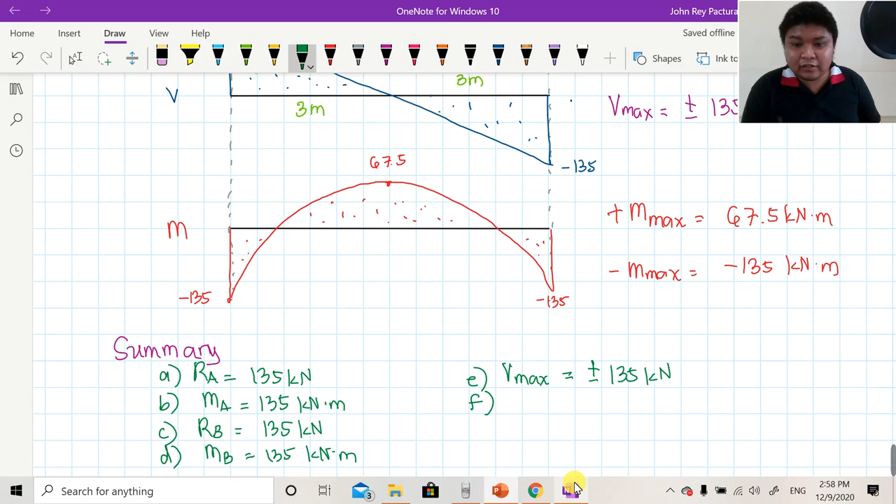For letter F, balikan natin. What is the maximum positive moment of the beam? So the maximum positive moment of the beam is 67.5 kilonewton meter. And lastly, for letter G, ang tinatanong is the maximum negative moment of the beam, negative 135 kilonewton meter.

So ito na yung summary guys ng ating analysis. So dito na natatapos itong example number 4.